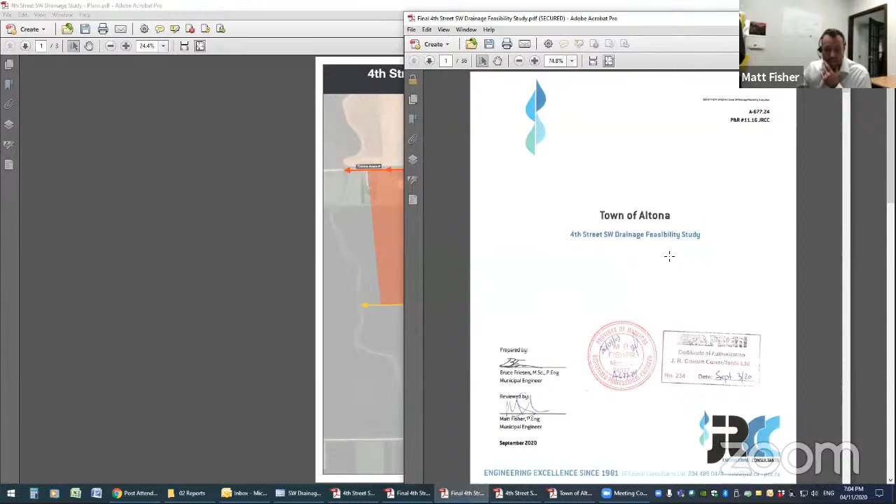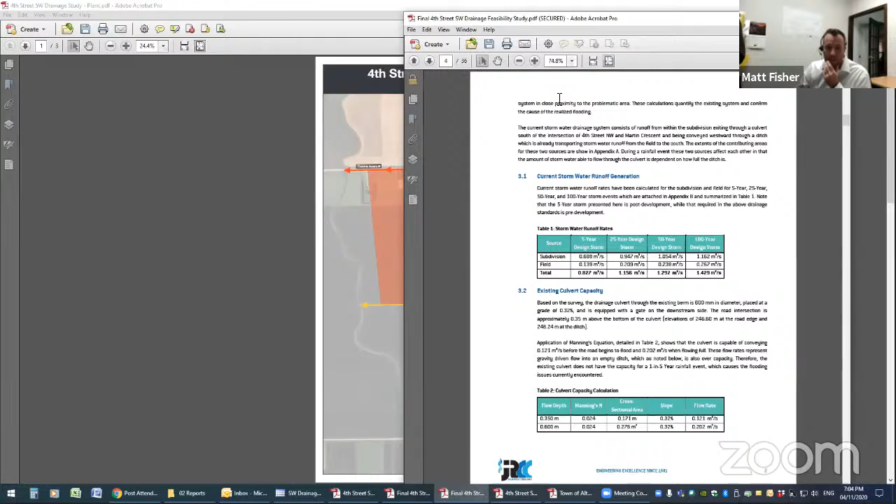So in looking at this overall drainage, once again, speaking about the yellow catchment only, I'm going to drag a report that we had done that was finalized in September 2020, the 4th Street Southwest drainage feasibility study. A couple of the key items that I'd like you to note is the total amount of water flow that we're expecting during different types of rainfall events. So during a 5-year rainfall event, we're expecting 0.688 cubic meters per second. 25-year rainfall event, 0.947, and then you get the idea as we get into more intense rainfall events. Now, just as a general note, a 1 in 5-year rainfall event is expected to, I guess, happen once every 5 years.

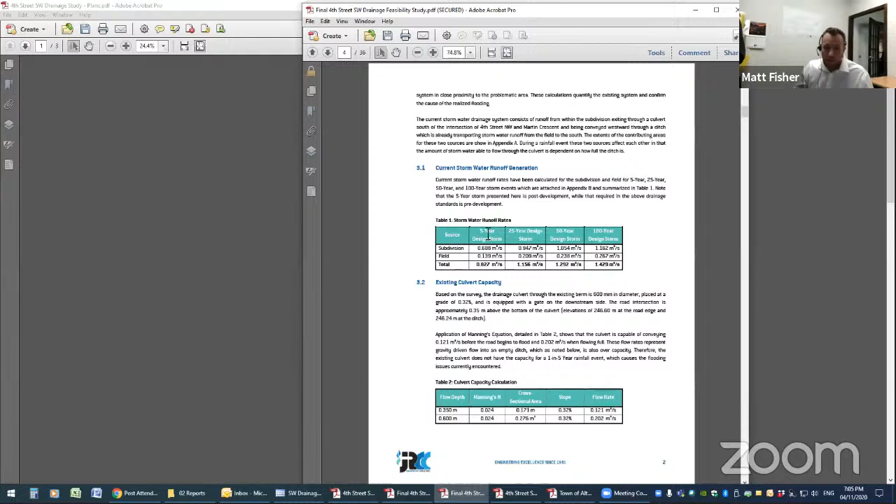So not to say that it won't happen once every 10 years, or it might happen twice in 1 year, just looking at the frequency based on past records that we had. So with that in mind, if we're looking at a 1 in 5 year rainfall event for this yellow section, we're expecting 0.688 cubic meters a second.

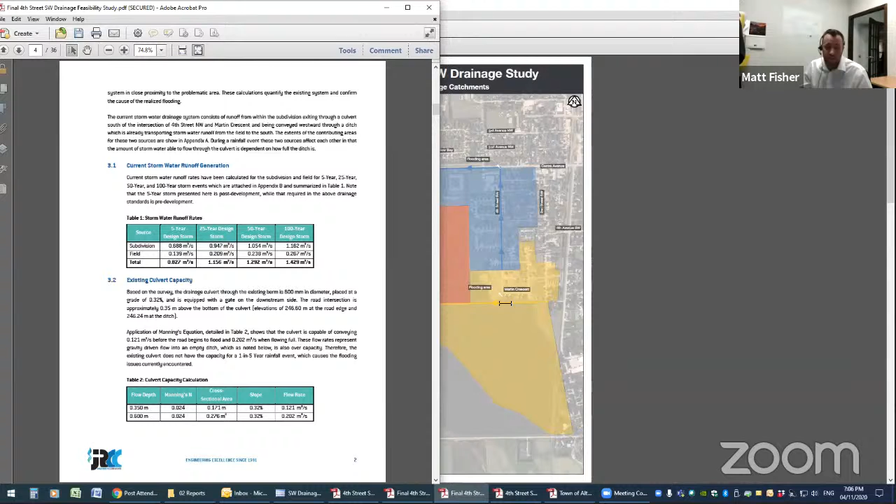Now, one of the key things that we looked at right off the bat to determine what the potential issue was, we looked at this culvert that crosses through the existing berm just south of 4th Street Southwest, getting into this ditch along the south property line. Let me just drag it over so you can see both. So this is the first point that we looked at, that specific culvert. When we looked at the capacity of that culvert, before the road floods, this is a really key number, we can get 0.121 cubic meters a second.

So what's important to understand is the culvert allows you to get 0.121 cubic meters a second. However, a peak flow that we're expecting during just a 1 in 5 year rainfall event is 0.688. So almost 6 times the amount of flow is coming to that culvert that's allowed to actually get through it. That definitely sets off some red flags. I don't think that's a surprise to anyone that knows that area and knows how frequently we get flooding at that location. But that verifies what we already understood.

As I keep going on, and we looked at this existing ditch, the flow through this existing ditch as it gets past this culvert, assuming we're able to get full flow, is 0.792 cubic meters a second. So if I go back to the table, that ditch has a capacity for about a 1 in 5 year rainfall event, but anything past that, a 1 in 25, a 1 in 50, and a 1 in 100 year rainfall event, it will not have capacity for the amount of water that comes through. So I think what that points out is the drainage issues that you guys are having, and confirms that with the numbers that we're seeing.

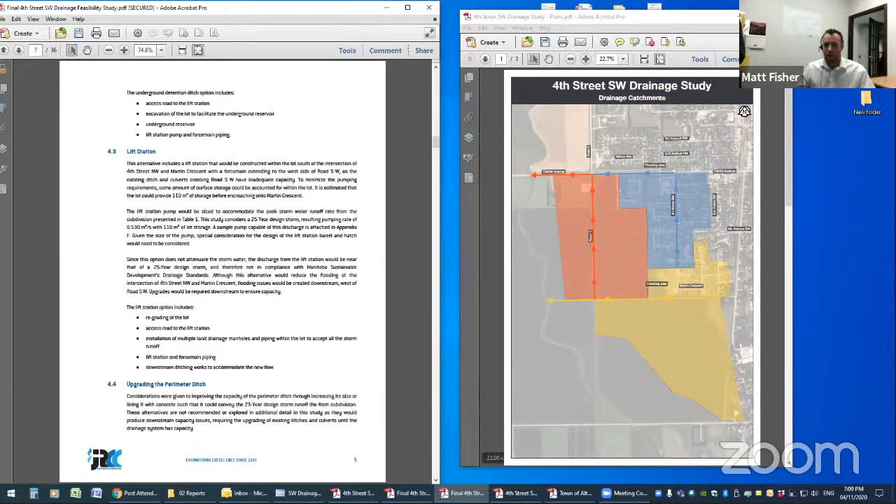So then we got into our preferred option, which, as I scroll down one more slide, is shown on this plan. So a couple of key notes in our proposed solution is it's a phased approach. And what we want to see in each of these phases is that the initial phase is providing the benefit that we're hoping for before we move on to the next phase. So in phase 1, the plan would be to dig a ditch across from Road 5 directly west to meet up with this existing creek.

The idea of this would be to not have Road 5, the north end of Road 5, surcharged or under capacity, as we talked about. And then it also alleviates some of the water that's going to Centre Avenue, which we'll talk about in a couple of minutes. So like I said, phase 1 was to increase the size of these 2 culverts and construct a ditch in between the creek and Road 5.

I'll show you on another set of plans generally what it would look like. Starting at the creek, we tie into the creek, dig a ditch all the way to Road 5, upgrade these culverts. Right now, as I said, they're under capacity. And then if we continue along towards the left and then go to the bottom side of the screen, this is the edge of those culverts.

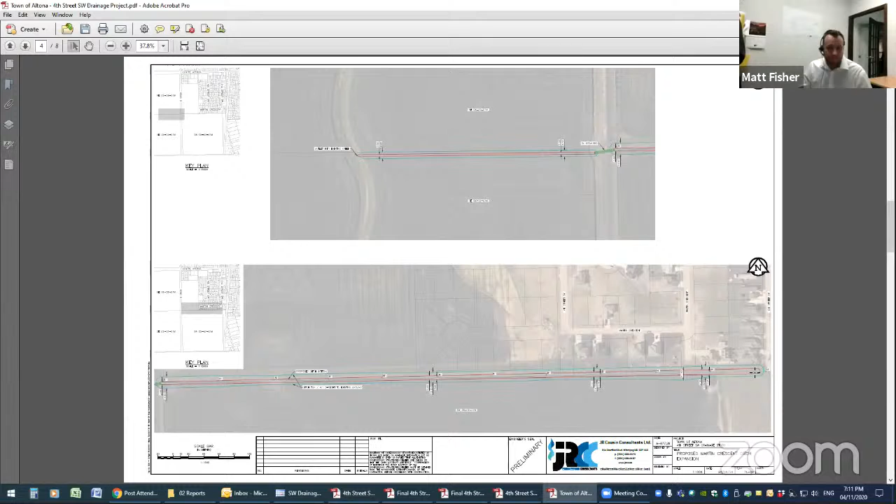And then we'll continue east all the way past 4th Street Southwest and go right to the end of the existing ditch. The plan would be to widen this ditch to provide additional capacity. So that is talking about phase 1. Phase 2, I touched on just a little bit. It would be widening this ditch all the way to the end of the field. The intent of that would be, once again, to upgrade or increase capacity of our stormwater catchment.

So we would look for phase 1. We would maybe do that at an initial phase, understanding that these culverts are causing a bottleneck. And once we put these culverts in and construct this ditch, that should alleviate some of this bottleneck right at this point as it enters the culvert. Then phase 2 would be to widen this ditch. And what we'd want to see is that during rainfall events, this ditch has capacity. So you would have a small amount of ponding or small amount of water heading through it. But it would not be constricted by these existing culverts, since we would have upgraded them.

What we would see after phase 1 and phase 2 is that we would still have ponding on 4th Street Southwest, because as we talked about, this culvert doesn't have the capacity to send enough water that's coming to this intersection into this ditch. But what we'd want to do is make sure that this ditch was all working properly.

I guess one kind of important thing to note is when we're designing drainage systems, we're using the 1 in 5 year rainfall event or 1 in 25 year rainfall event that has been modeled over reviewing a number of different rainfall events over the last number of years. But as we know, every rainfall event's a little bit different. So what we're trying to do is come up with a solution that we can test over time based on different types of rainfalls and make sure that it's performing the way it's supposed to.

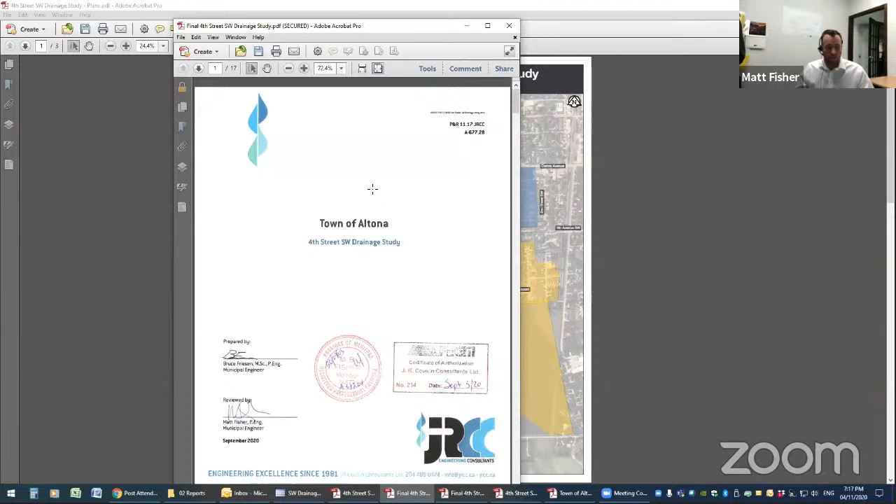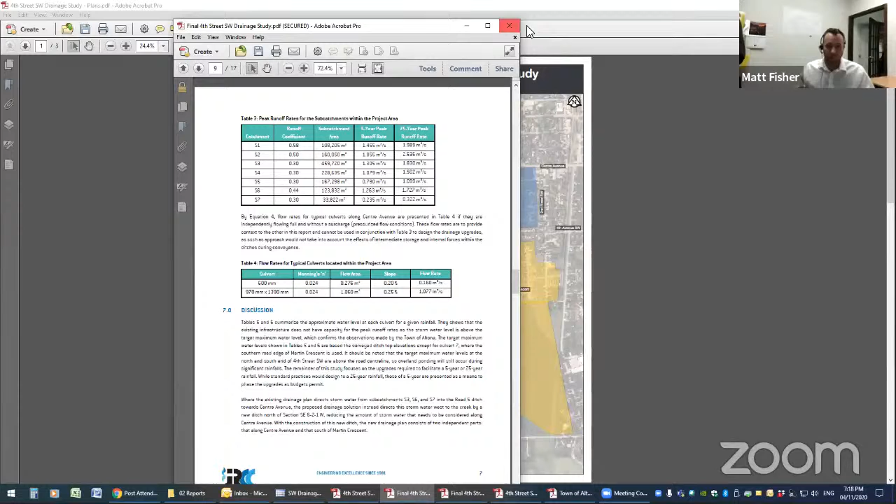So once again, we have looked at these numbers. Here's another report that we had put together, 4th Street Southwest Drainage Study. If you're interested, feel free to read some of the background information on it. But I think some of the key aspects that everyone's gonna be interested in, once again, would be the amount of flow that is coming.

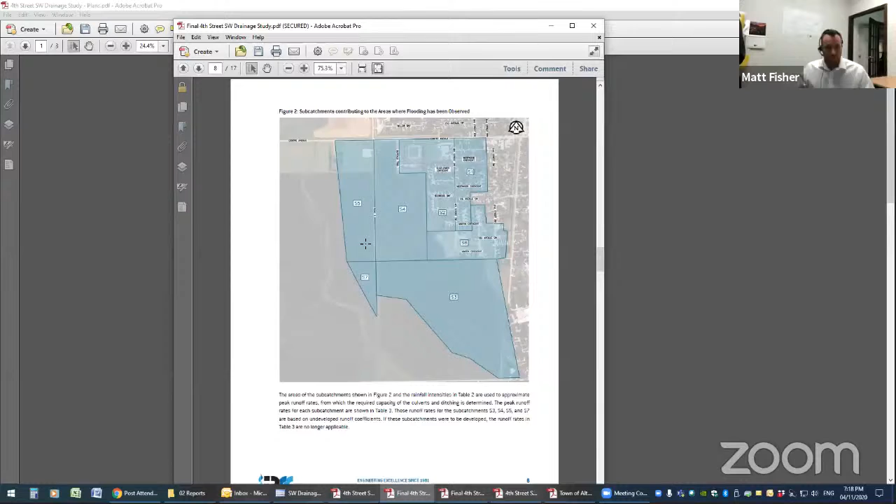So we've subdivided some of this blue area, and I want you to focus on S1 and S2, basically the east portion of 4th Street Southwest, and then the west portion, that's S2. So if we look at S1 and S2, during a 1 in 5 year rainfall event, we're expecting 1.455 cubic meters a second from S1 and 1.855 cubic meters a second from S2. So combining those, we're looking at around 3.3 cubic meters per second.

When we look once again at the culvert capacity along Centre Avenue, we've got one 970 by 1390 culvert at each of the road crossings and approaches. And when we look at the capacity of each of those culverts, we are about 1/3 of the overall volume of water that comes out during a 1 in 5 year rainfall event. So the capacity of those culverts is 1.077 cubic meters a second. And like I said, we're expecting about 3.3 cubic meters per second.

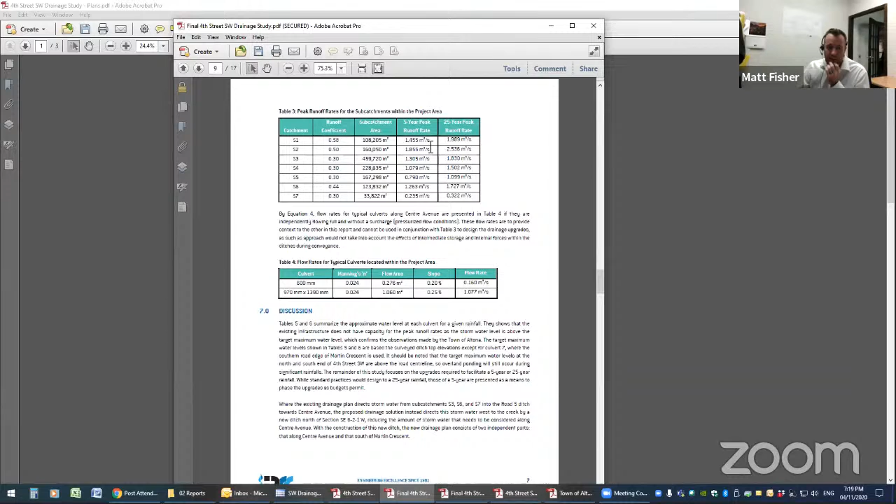So that tells us that the ditch along Centre Avenue does not have adequate capacity for the amount of water that's coming to it. So what I'm sure you have seen during large rainfall events is that this ditch is completely full, backed up, and bottlenecking at a number of these different culverts along the way, which does not allow water from 4th Street Southwest to get into the ditch. So that's the first problem that we've run into.

The second problem that we've run into is how the water actually comes off of 4th Street Southwest. On the east side, it runs through a kind of a curb cut into an existing ditch, and then through two culverts that run across 4th Street Southwest, once again, undersized. And then the water from the west side of 4th Street Southwest flows in through a kind of a manhole catch basin, through a culvert into the existing ditch.

And once again, unfortunately, it does not have the capacity. So the couple of different issues that we've run into is the water can't get off of 4th Street Southwest quick enough, which causes the backup, as I'm sure everyone has seen during these large rainfall events. And then once it actually gets off the road, now you've got backup in this ditch. So we've got a couple of things that we need to improve on at this north end as well.

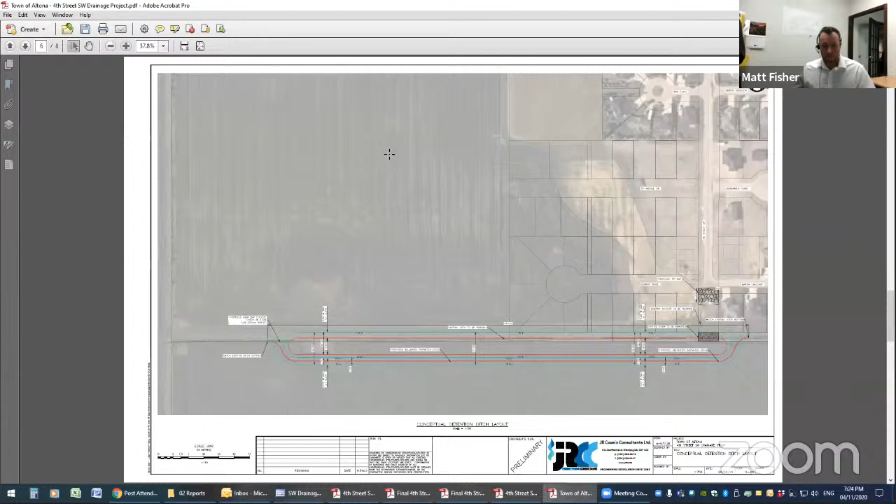I don't think I've got anything further. Jordan, you know what, I might show one last, actually, no, sorry, I got 2 more things to show. So these are just a couple of the solutions that we looked at previously, and those are the catchments. I wanted to find this plan.

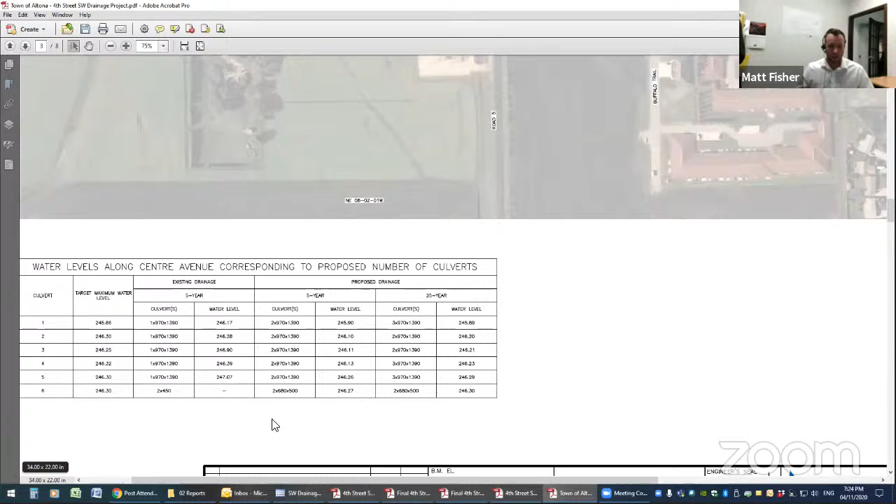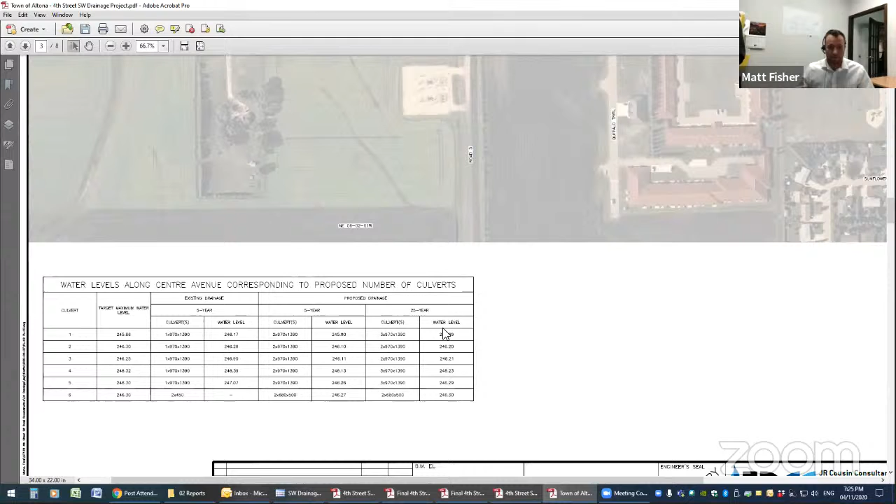I jumped over it. So essentially, this plan is showing what our recommended solution would be, and how it will lower the expected water level. So by adding these culverts during, let's say, a 1 in 5 year rainfall event, if you compare these 2 numbers, we're reducing the amount of potential ponding by 6 to 12 inches during those major rainfall events during a 1 in 5 year, and then during a 1 in 25-year rainfall event we'll also be reducing the expected water levels in the ditch. Lastly, I know that cost is of course very important for these solutions.

Starting off on the one we just talked about, the Centre Avenue upgrades, the phase 1 approach included the upgrading of 4th Street Southwest. Phase 2 was adding more culverts in the ditch, and phase 3 was the same. The estimated total cost for phase 1, 2, and 3 was $621,000. If we look at the other alternative, maybe for those who are joining a little bit late, I'll just go over it very quickly.

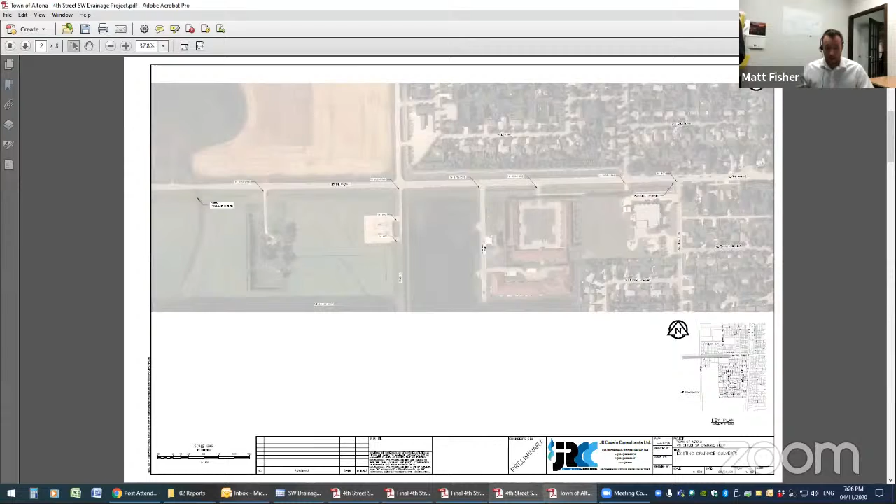The other alternative was the south portion of 4th Street Southwest, and the phased approach was to install another ditch that goes to the creek, upgrade these culverts, widen this existing ditch, and then ultimately remove the culvert that crosses this berm to allow additional flow through there. So with that, we've got a 3-phase estimate of around 193,000 with each of the phases broken up.

Jordan, if I could pass it back to you, have we received any questions during that presentation? Absolutely. Thank you, Matt. So we have several questions that we received via email ahead of time, so I think we'll start with those. I know you addressed some of them during your presentation. We'll just go over them again briefly. And then there were a couple of questions that came in while the presentation was going on.

So the first question was that from the notice we received, it seems that the project does not include the drainage problem at Martin Crescent and 4th Street, that after heavy rains and during spring thaw, it's at times not possible to cross at Martin Crescent onto 4th on foot. Why is this not being addressed? I think largely all the detail couldn't be placed on the notice that went out, but maybe you can just address that here.

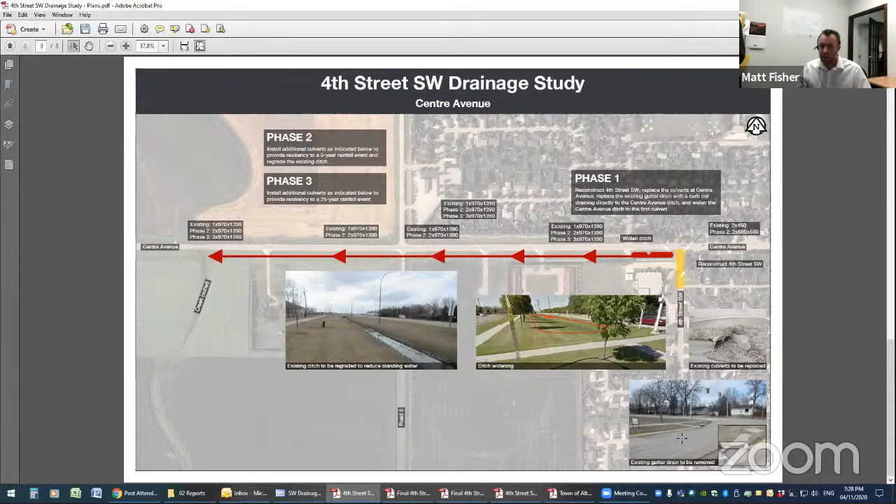Absolutely. I think that's a really important question, because even during my presentation, I'm really focusing on the intersection of 4th Street Southwest and Centre Avenue and the ditching along Centre Avenue, and that's because that's where the major issue is. But the question's a very good one. Once we alleviate some of this ponding at the intersection... what's happening is the ponding is backing up all the way down 4th Street Southwest and causing issues downstream. Let me pull up my overall plan.

So it's not just ponding right at this intersection, it's ponding all the way along 4th Street to whatever that water level is based on the total amount of rainfall. So it is expected that there would be significant ponding all the way along 4th Street that would be alleviated with these potential solutions. Right. So in your study, would you have taken grades along that road, or we just know that the water would run if there was capacity for it to run away?

We've certainly taken grades. I don't think it's any surprise that the grade is minimal in Altona, and that's kind of understood. It's what we've got to work with. But there is adequate grade to move water from the south end, the high point, all the way to Centre Avenue. There's adequate grade and positive grade all the way along that street. The issue becomes this intersection doesn't have enough capacity to get off the road, first of all, and then once it gets off the road, it's restricted in the ditch.

I think the question also reflected that they have water sitting in that intersection in spring. And what's happening is the streets move from spring, summer, and winter. They're shifting, and what happens is that intersection actually becomes a little lower. People see that normally on manholes in the street. They'll often stick out further, and people think that the manholes are moving, but it's not the manholes, it's the streets that shift.

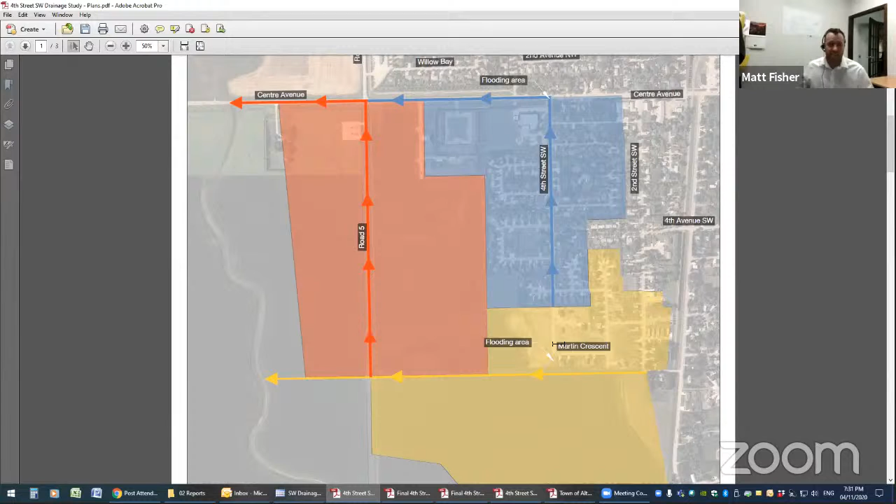You bet, and I think that's a really important question as well. When we excavate this berm, there's certainly going to be some anxious people watching that and wanting to know that during some of these flooding events we won't have created an issue. So I think it's important to note that with the phased approach that we talked about, we're looking for cues in each phase to then move on to the next phase.

So we're looking for the water. Once we get these upgraded culverts done, we don't want to see water at this culvert anymore. And so what that cues us is, okay, now that this culvert is upgraded, we've now increased the capacity. Now water can actually drain the way it's supposed to towards the west. And then certainly when we get to this removal of the berm, we want to make sure that everything's working properly.

Also, like I said, we are designing based on rainfall events. Typical rainfall events happen during the summer months, and not exactly at the same time as major flooding events. So we're talking about two different things. During a spring flood, for example, it's not going to happen instantaneously and catch us completely off guard. There's a very good chance that we'll know that overland flooding is happening long before it becomes a disastrous level, which allows us to make precautions to close in that berm temporarily to protect those houses and residents.

Right. So maybe the analogy here would be similar to Morris Dike and Highway 75, that there's an exit point through there. If there's going to be a flood, then you just fill it up temporarily. That's exactly right. Okay. Sorry, just to touch on that point, we don't want to stop good drainage during these rainfall events for the whole summer just because we're concerned about some spring flooding.

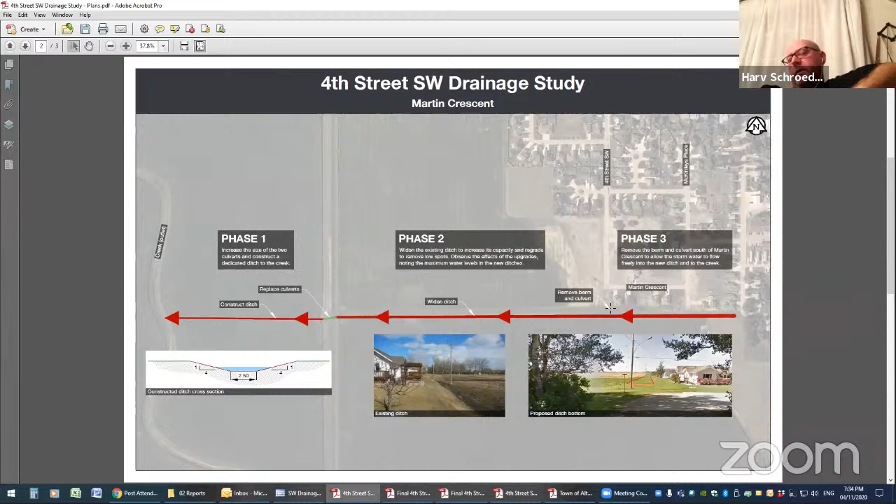The drainage system west of Road 5 has been changed after the 97 flood to alleviate some of that water that came towards the southern part of town there. So that dike definitely has its purpose, but things have changed after that flood, even further down the Buffalo Creek, to alleviate pressure. And so I don't know if that dike has actually been used after the 97 flood.

Sounds good. Thank you. Then I think we'll stick to questions for the south side for now. The question, I'm not sure exactly which resident wrote this, I don't know whose property to be addressing, but it was asking, do I have to worry about getting flooded out if we have a 3-inch rainfall when you cut the berm? I don't know, Sarah, if you would be aware of where that would be coming from exactly.

Yeah, and I guess my response to that would be, I would be more so worried about you getting flooded out on the upstream side of the berm if it's still there, as opposed to if the berm was gone. I think what we're showing with these 3 phases is we're trying to get the water away from this intersection as quick as possible, and that will in fact help during that major rainfall event as opposed to the opposite.

We are increasing the size of this ditch, so it's not like we're just moving the water from the road, which is of course a high priority. It gets shut down a number of different times during rainfall events, but we'd be not just shifting the water off the road into the ditch, we'd actually be getting it through the ditch into the creek. Right.

Okay, so I'm going to shift to some questions more for the north side, and there's some generic questions as well that I'll maybe get to towards the end. Question is, if 4th Street is regraded, does that mean the ramp up to Centre Avenue will be steeper? If so, not a problem most of the year, except in winter when the intersection is slippery. Maybe Clint or Dan, you could address that.

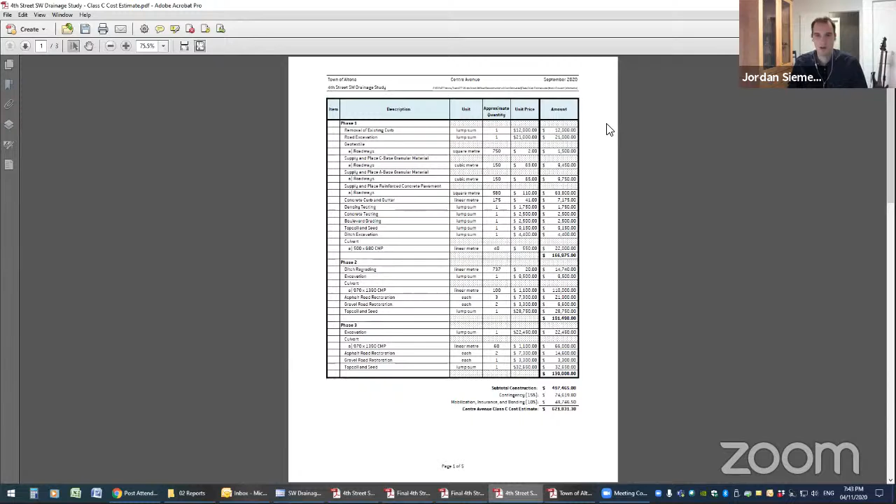Right. So, like for an analogy, the downtown drainage project doesn't really work in phases, but it's a $1.5 million to $2 million project, and so it's taken a long time until resources were ever in place to get to it. The benefit of a phased approach is we can actually start working and tackling this project a little bit at a time instead of waiting another 10 or 20 years to do that.

Yeah, Matt is very aware about our preference for phasing. A lot of our projects, bigger projects, have been done in phases. Our lagoon, that was a 3-phase project. And like you said, the downtown drainage, you can't really do in phases. Everything was necessary in one shot to make that system effective. So that's exactly right.

All right, we've had good participation so far. I got, I think, one more question here. How are you going to get the water to flow faster to the west on a major rainfall as the slope is very little? I'm assuming we're talking this south ditch. I guess we're talking about both essentially. Probably could be either or.